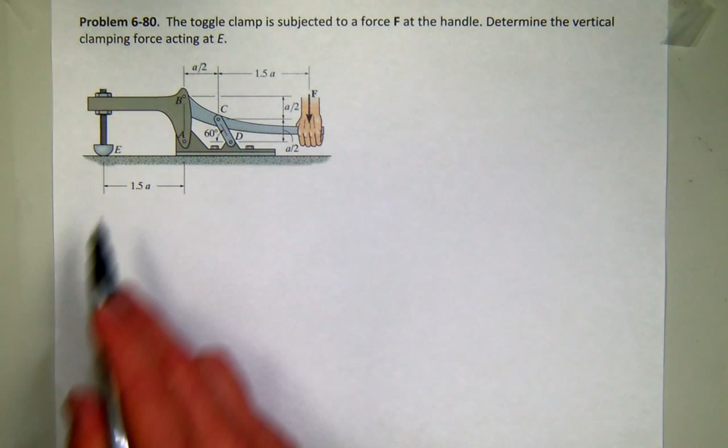AX and AY. And then over here, this contact force is a single force perpendicular to the distance, so there would be 1, 2, 3 unknowns there. So I can break it apart into two free bodies with 6 total unknowns.

So let's start with the curved handle. I'll just kind of draw it as a curve. And I have my force F applied out here at the end. And over here,

I have the force in CD. Let me go ahead and pencil in that that's a 60 degree.

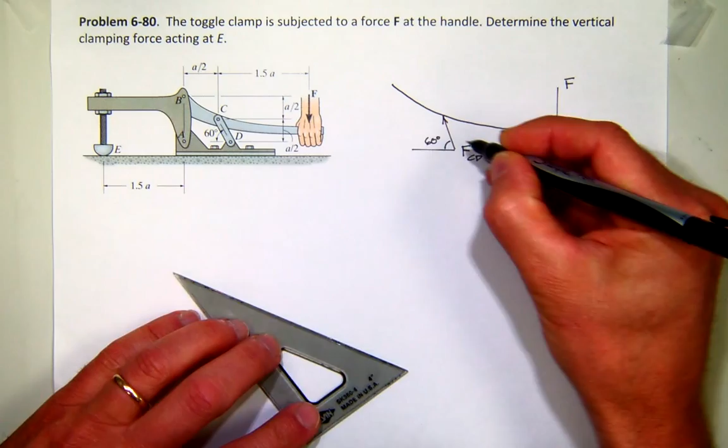And then I swing up to point B, and at B I would have two unknowns. So I'll assume BX and BY.

I should have drawn this in blue, right? Can't really go over it very much, but I'll try to go over it. So those are my three unknowns.

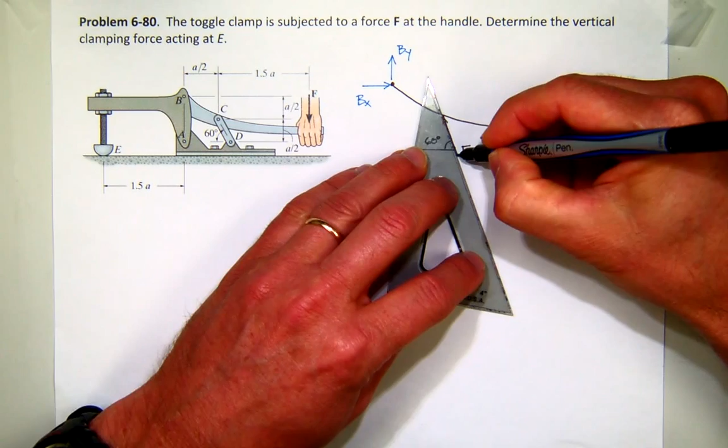So we'll call this free body diagram BC.

And then once I get that solution, I'll apply it to a free body diagram of ABE, and we should be able to find it.

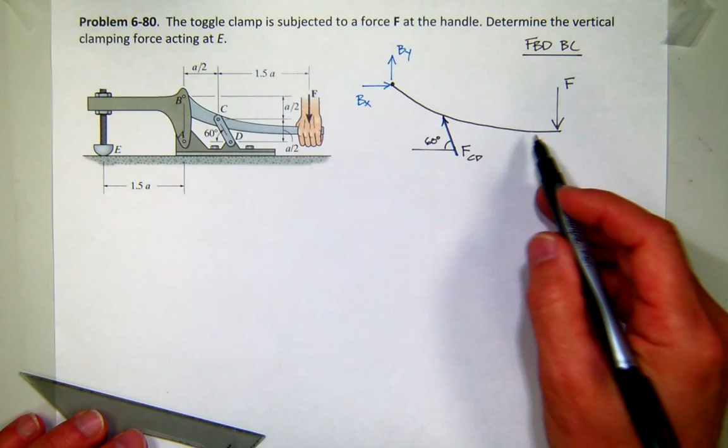So how do I find all this? Let's see if I can put in some distances here. So it looks like from this point of contact over to B, what is that distance?

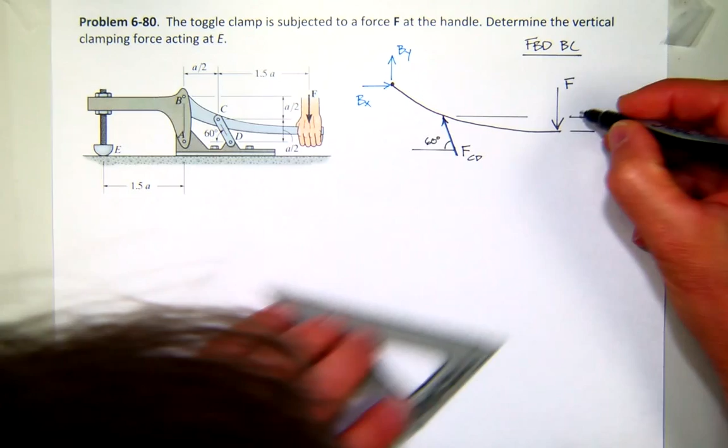It looks like it's... that's going to be hard to.

What is that force? Do I need to know that? Maybe I don't need to know that. Well, I know the distance from here to here

is what? A over 2, right? And the force here, well, the distance from B to that force would be 2A. I think that might be all I need.

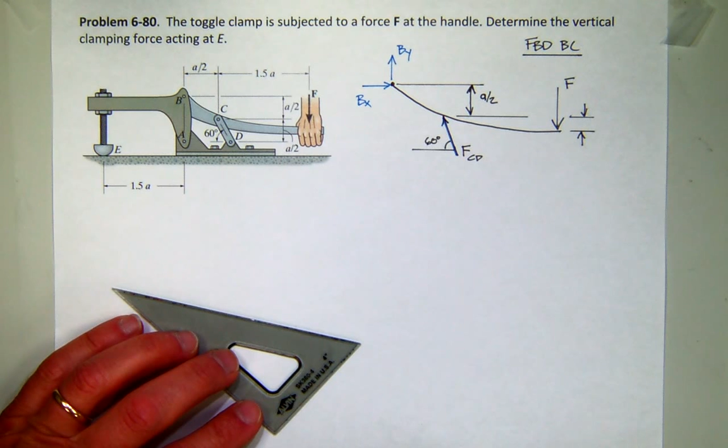All right, so how can I find, I'm trying to get this value for F to work all the way through to E. So how do I get this force F as quickly as possible into BX and BY? Basically, how do I find BX and BY?

What do you guys think? What if I sum moments about B? What will I get?

I'll get CD in terms of F, and then if I have CD, I can sum forces X and Y and get BX and BY. You see that as a good strategy?

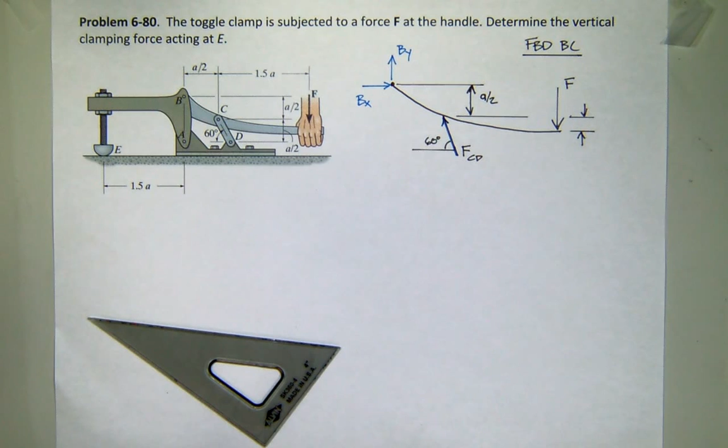I think if I try to sum moments at C, you'll see I have both my components. That'll give me one equation and two unknowns. If I sum moments anywhere else, I'm going to get all three unknowns.

So it looks like the best place to start would be at B, where I can eliminate two of my unknowns and find CD. Even though I don't need it right now, that's not going to help me. It seems like it's not going to help me.

It really will. So let's sum moments about B.

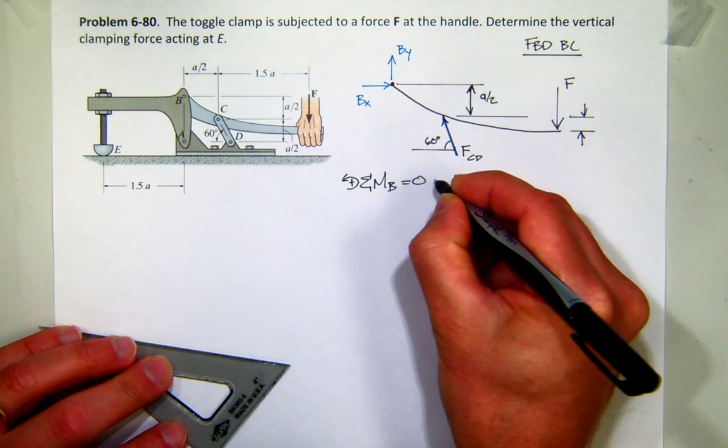So to help you visualize this, I'll go ahead and try to pencil in here my two components. Probably won't look very well, but you'll see there's an X and a Y component.

Let's start with the vertical component. What's the vertical component of CD? It would be F CD sine 60. And what's its moment arm to be? It would be A over 2.

A over 2. And that would create positive moment about B. What about the X component? Well, that's going to be CD cosine 60.

And it's going to have a moment arm of A over 2. Is it going to create positive or negative moment about B? Negative. And then finally I have F, and F creates what kind of moment about B? Negative. So I got negative F, and its moment arm is this distance, which looks like 2A.

So I should be able to solve for FCD in terms of F and A. Let's see. I can factor the A over 2 out. Well, first of all, I can divide everything by A, right?

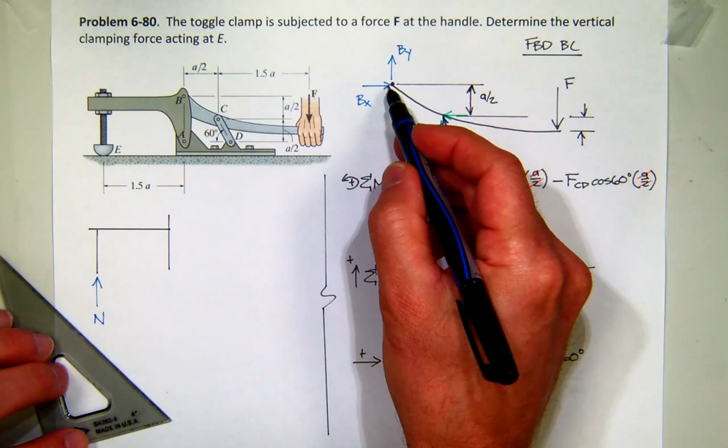So over here it has to be what? Equal and opposite. And then I'll come to point A and I'll just assume AY and AX. And this total height here is A, and this distance looks like 1.5A.

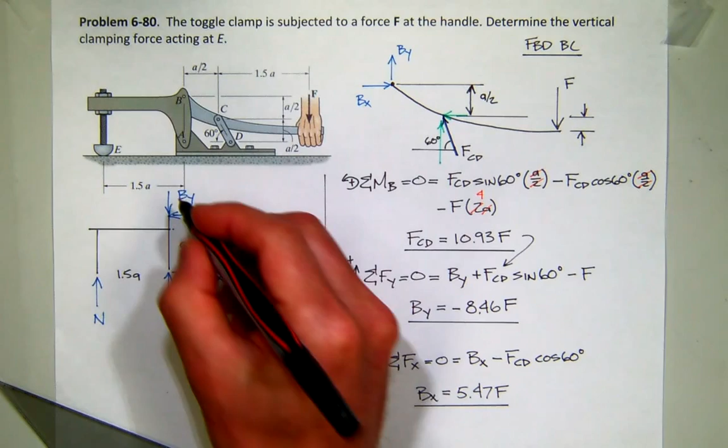Now remember, I'm just trying to get this contact force. So I've already found By and Bx. So where's a great place to sum moments? About A. So if I come here and sum moments about A, first of all, AX and AY, I don't really need those values, and they won't create any moment about A. BY will create no moment about A. Only BX will, and BX will create positive moment with a moment arm of A.

And it'll be reacted by the normal force, which creates negative moment, with the moment arm of 1.5A. So it looks like the normal force is just going to be Bx divided by 1.5. And we got Bx as 5.47, so I divide that by 1.5. I get 3.64 F. So whatever, if I push down, say 100 pounds here, the resultant force through this mechanism is 364 pounds. That's pretty good. It's like almost 4 to 1.